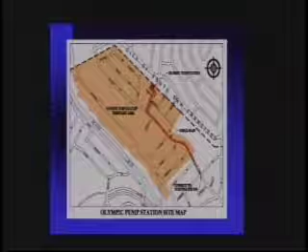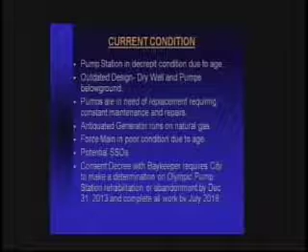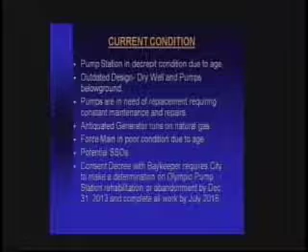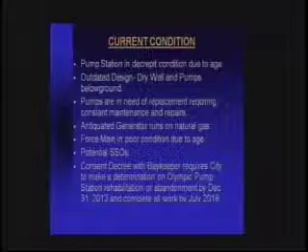Regarding the current condition of the pump station, this pump station was constructed in the 1960s, and the station itself is in pretty decrepit condition due to its age. It's an outdated design. The dry well is where the pumps are located, where the discharge manifold is located, and the pumps are located below ground.

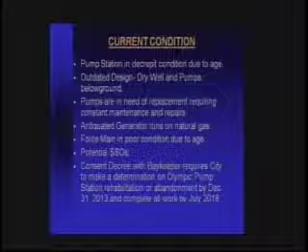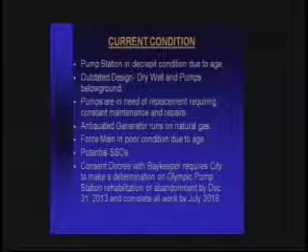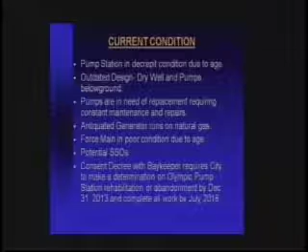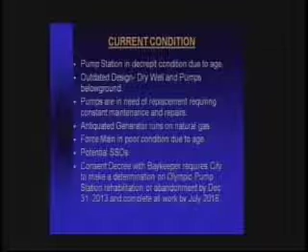This makes it difficult for maintenance employees to perform their duty—they have to actually go down into the dry pit, which is potentially a confined space and an unsafe condition. They have to carry tools down a vertical ladder with metal rungs, and then perform their tasks within the pit. The pumps are also in need of replacement, requiring constant maintenance and repairs.

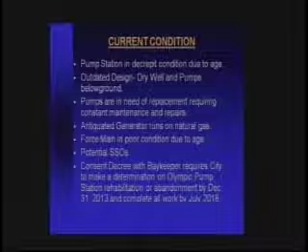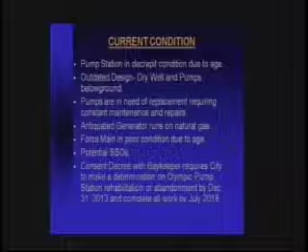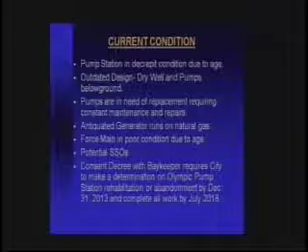There's also an antiquated generator that runs on natural gas, which is not the preferred method. The more acceptable way is to have a self-contained diesel tank below the generator, so that in a real catastrophe where natural gas might be shut off, the generator isn't rendered essentially useless.

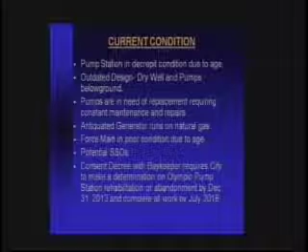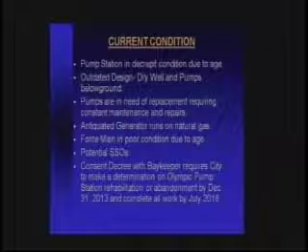The force main itself is about half a mile long. It's in poor condition due to its age. All these conditions make this a potentially SSO—sanitary sewer overflow—prone situation.

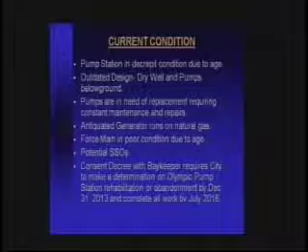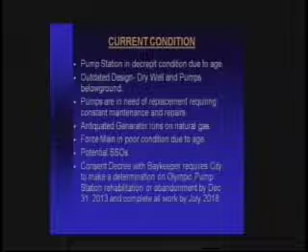One important issue is that the consent decree with the Baykeeper requires the city to make a determination on the Olympic pump station—whether to rehabilitate or to abandon it—by December 31st of 2013, and to complete all work by July 2018.

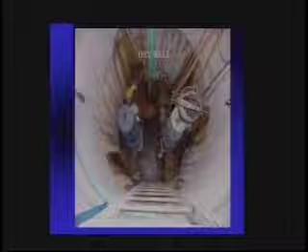This is a picture of the dry well with the pump pit. It's a relatively tight space for staff to work in, and even though it's intended to be a dry well, a pump pit, at times it can get pretty wet from leakage of equipment, making it an unsafe condition.

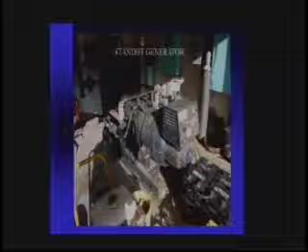This next picture shows the antiquated emergency generator. It's definitely vintage, and it runs on natural gas.

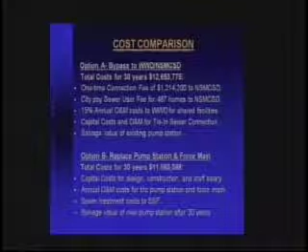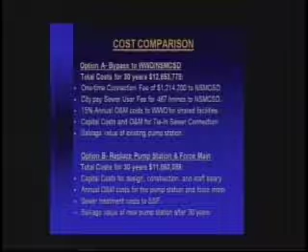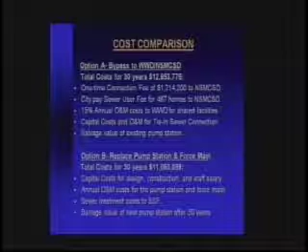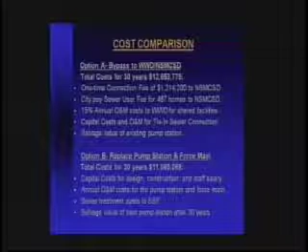The detailed comparison and analysis of the two options: Option A being to create a sewer bypass and discharge to the Westboro Water District, and then eventually to Daly City, North San Mateo County Sanitation District. Option B is to replace and rehabilitate the pump station and also the force main. The detailed analysis of these two options compares the total cost and also other intangibles.

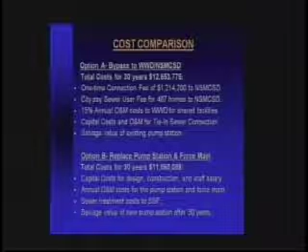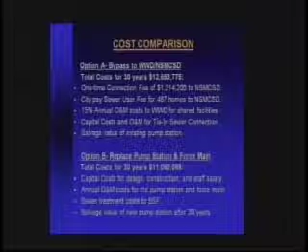For the cost comparison, Option A—creating a bypass to Westboro Water District and Daly City—the total cost for 30 years as calculated is just about $12.6 million.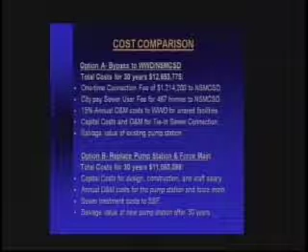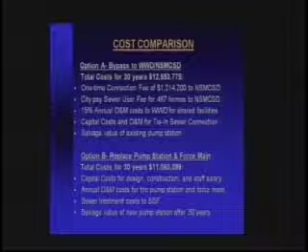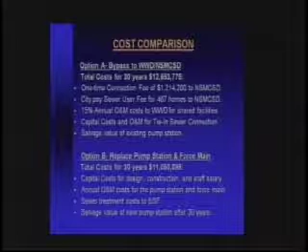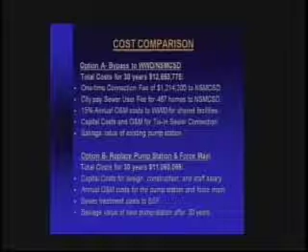This cost included a one-time connection fee of $1.2 million to North San Mateo County Sanitation District. The city also has to pay a sewer user fee for the 467 homes to North San Mateo County Sanitation District. The city will also pay 15% of the annual operation and maintenance costs to Westborough Water District for the shared sewer facility, where the sewage will be routed to Daly City.

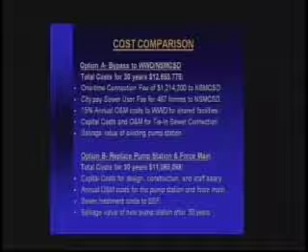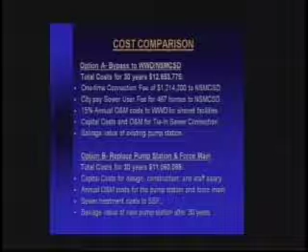The costs also include capital costs and annual operation and maintenance for the tie-in sewer connection, which is a relatively short distance of pipe, about 200 feet from the pump station down the street to a manhole on Shannon in the city of South San Francisco. It also takes into account the salvage value of the existing pump station.

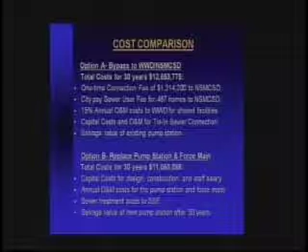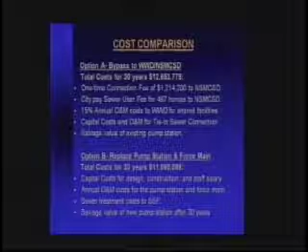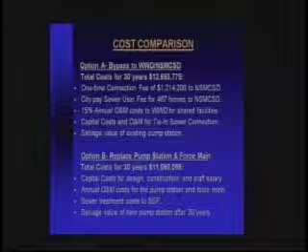For option B, to replace the pump station and force main, the total cost for 30 years is calculated at right around $11 million. This includes the capital cost for design, construction, and staff salary for the replacement of the pump station.

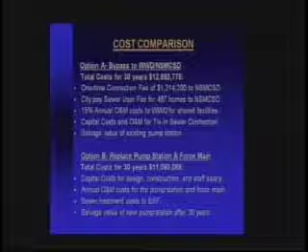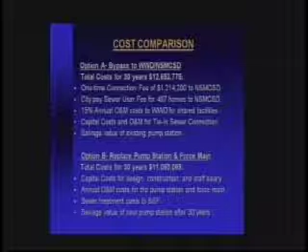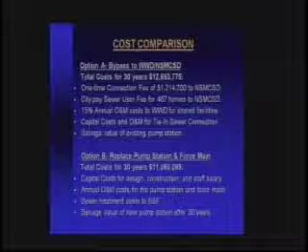Then there is the annual operation and maintenance cost for the pump station and force main, and the sewer treatment cost to South San Francisco for the sewage of the 467 homes. In addition, we also take into account the salvage value of the new pump station at the end of the 30-year period.

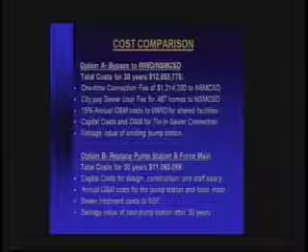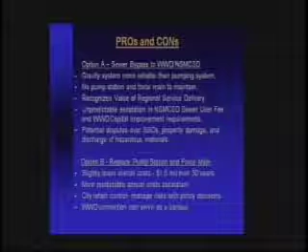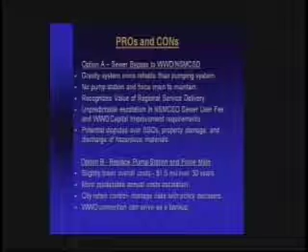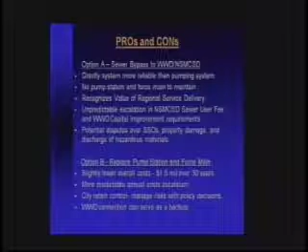Now, the pros and cons of the two options. For option A, the sewer bypass to Westborough Water District and Daly City, the pros are that the gravity system is definitely more reliable than the pump system. And with that sewer bypass connection, the city would not have to maintain a pump station or the force main.

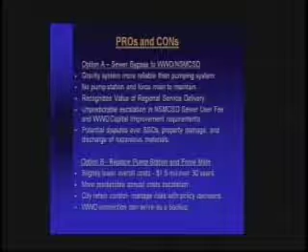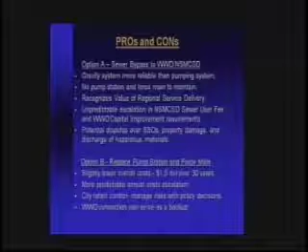One big plus of option A is that it recognizes the value of regional service delivery, which is for different agencies to share their facilities as well as services.

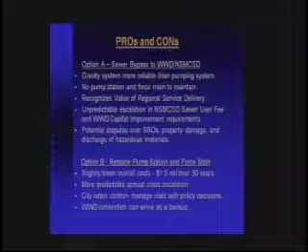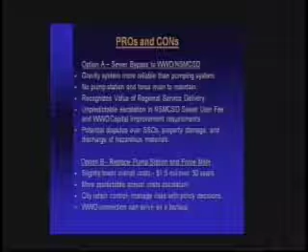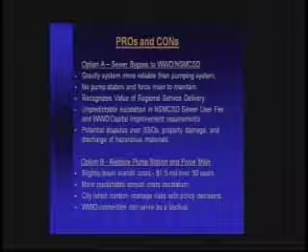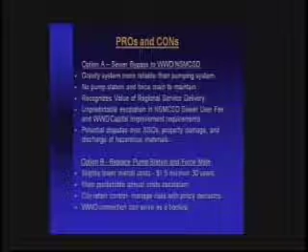On the downside, this option provides unpredictable escalations in the North San Mateo County Sanitation District sewer user fee, and also the Westborough Water District capital improvement requirement, being that the city is required to contribute 15% of Westborough Water District's annual operation and maintenance, including repair of the shared facilities.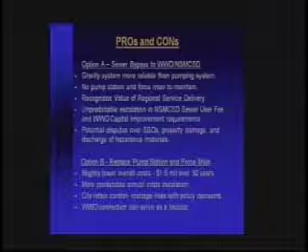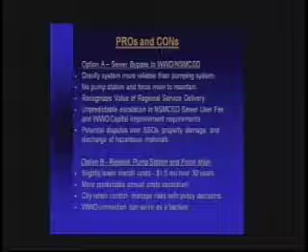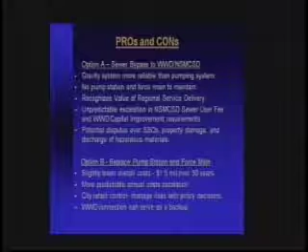Another minus for this option is that there could be potential disputes over sanitary sewer overflows — the source of the cost of a sanitary sewer overflow, property damage, and possibly questions of responsibility for any hazardous material discharged into the sewer system.

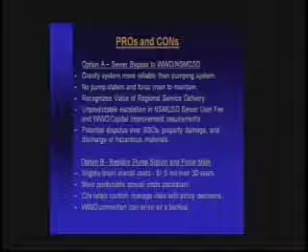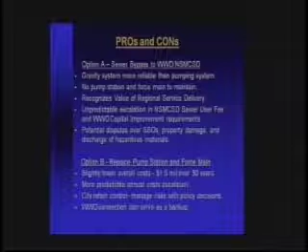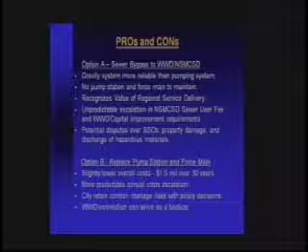Now with option B, replacing the pump station and force main — as you can see in the previous cost comparison, there is a slightly lower overall cost for option B to replace the pump station: $12.5 million versus $11 million, an order of $1.5 million over 30 years.

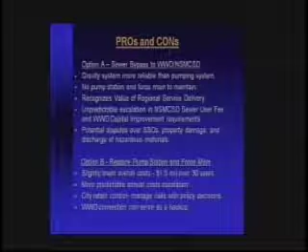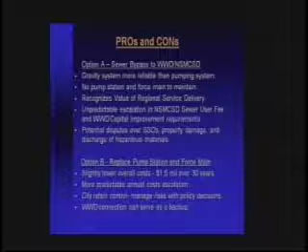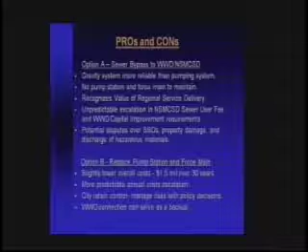With the city maintaining the pump station and the force main, it would be more predictable for the city regarding annual cost escalation in fees and sewer rates. An additional benefit is that the city will retain control, and we can manage any of the associated risks with policy decisions.

Plus, with the pump station and force main, the Westborough Water District connection can always still remain there as the Plan B emergency discharge location.

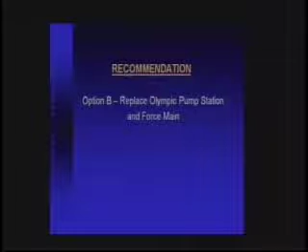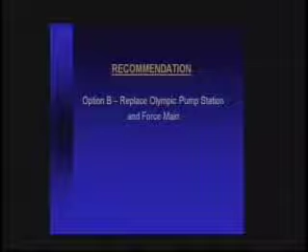So, in conclusion, the detailed analysis identified the pros and cons associated with each of these two options. The alternative, option A — to abandon the pump station and connect to the Westborough Water District and North San Mateo County Sanitation District — was previously thought of as the obvious preferred alternative. I mean, just construct a short piece of pipe, go over there, abandon the pump station: more cost effective, simple, and green.

But now, with this detailed analysis, we realize it's no longer that obvious. There are other issues to consider. Weighing the pros and cons, staff's recommendation is to go with option B, to replace the pump station and the force main. Thank you, and I'm here to answer any questions.

All right, any questions? Rico? I just had two quickly, then I want to listen to my colleagues to better understand.

On option one, you said there's a one-time connection fee of $1.2 million, which I believe would be for the 467 homes within the area that would get serviced. So if they're already connected, why is there a fee? I understand when we have a new project there's a connection fee and associated cost, but I don't understand the $1.2 million connection fee for something that's already connected.

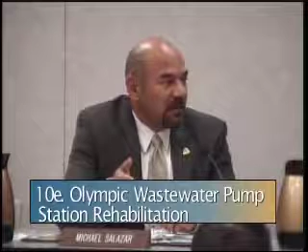Thank you. Anyone else? A couple of comments. I just want to say I think that if we do have a policy, it should be our policy to always look regionally at these solutions rather than trying to isolate our systems from their systems, where it makes logical sense. I think, unfortunately, we weren't able to come to terms that were agreeable that would have made this cost effective, because it seems like the Westborough solution was, from a technical standpoint, the better solution, but financially it didn't work out, which is unfortunate.

But I do think we need to continue looking at those larger solutions, and so I commend the department on having the foresight to look into that, and I think we should continue to do that. I also appreciate the level of detail in this report. We don't normally see something this detailed, and having that financial analysis really helps drive the point, so I really appreciate that, thank you.

Irene? I was just going to echo what Michael said. I really do appreciate what you've done, and I know all the pages we have in front of us took a lot of time and effort and thoughtfulness, so it does help with our decision process. Thank you. I agree also. I think it's very important to at least have the analysis in front of us, whether it shows equal or some big disparity. I just like the idea of local control, especially what we've been through, seeing what we've been through the last number of years with SSOs and things. I think we have so much more local control.

There's no guarantee that another agency, if we signed up with them, isn't going to increase rates on us, having 467 homes in a city where everybody's paying the same thing except for 467 residences. It doesn't make sense to me, so I'm obviously for option B. Okay? I think staff has enough direction. Great, thank you very much. Thank you.